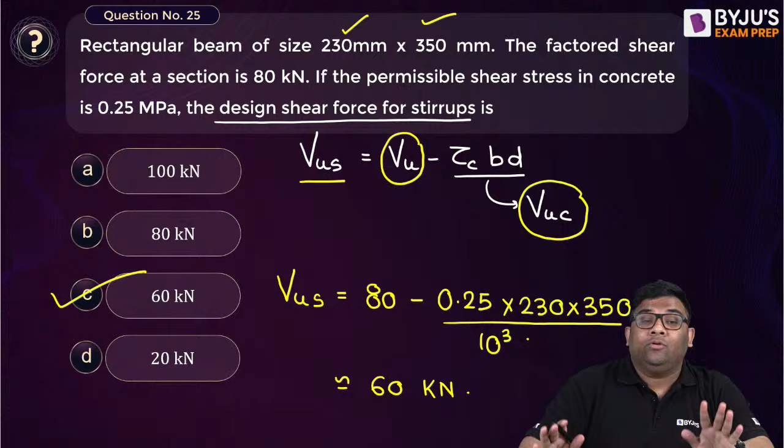Why I put this numerical? Ladies and gentlemen, why I put this numerical? Because you have to remember that in the examination, in state examinations especially, they will not always ask theory. Some 10-15% questions they will ask you are straightforward numericals which can be solved within 1 minute, and therefore you should be prepared for such straightforward numericals also.

Okay. Next question, question number 26. The maximum span to depth ratio for two-way continuous slab for Fe 250. That means what? Mild steel. Tell me what is the right answer to this? Two-way continuous slab. Yes, it is 40. I'll tell you. See, in two-way we'll have simply supported or continuous.

See, in one-way slab, whatever beam follows, one-way slab also follows the same thing. Means what? 7, 20, 26. 7, 20, 26 is followed by one-way slab and your beams. But when it comes to your two-way slabs, then you have to see if it is mild steel or HYSD. For mild steel, the ratios are 35 and 40.

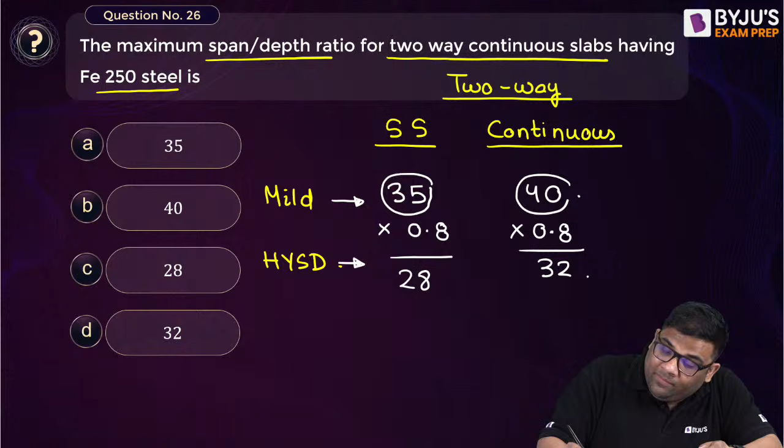But for HYSD steel, what you will do? Just multiply this with 0.8. So this will become 28. And multiply 0.8, you will get 32. So if you remember this for mild steel, you indirectly remember for your HYSD also. If you remember for mild steel, you indirectly remember for HYSD also. So it is written first of all, see.

Two-way, yes. Continuous, and then mild steel. So answer is what? 40. Understood? 40. If the question was two-way simply supported mild steel, answer would have been 35. Okay. Next question 27.

In WSM, under wind and earthquake load, the permissible stresses are increased by, very straightforward question. Come on, fast. We are only at question 27. Oh my God, we are so slow. I am explaining also, na? Okay, no problem. But let us make it fast. Straightforward, 33.33%.

Question number 28. What is the minimum lap length? Lap length means what? When you are joining two bars, you have to lap it. So the minimum lap length for bars under compression, what is the answer to this? Yes, it is 24 phi. This should be minimum 24 phi.

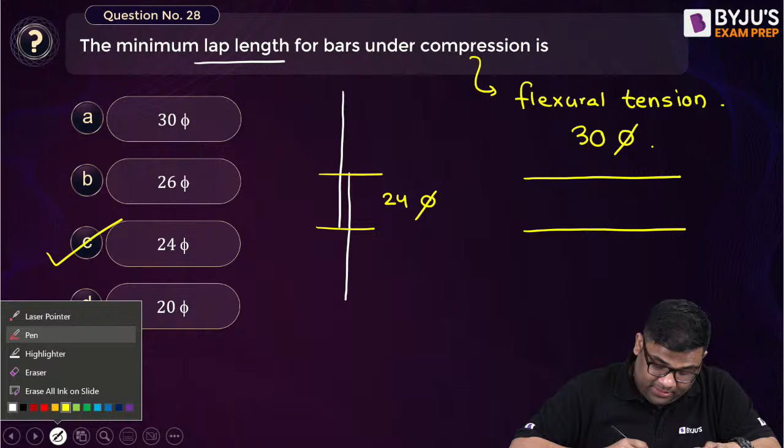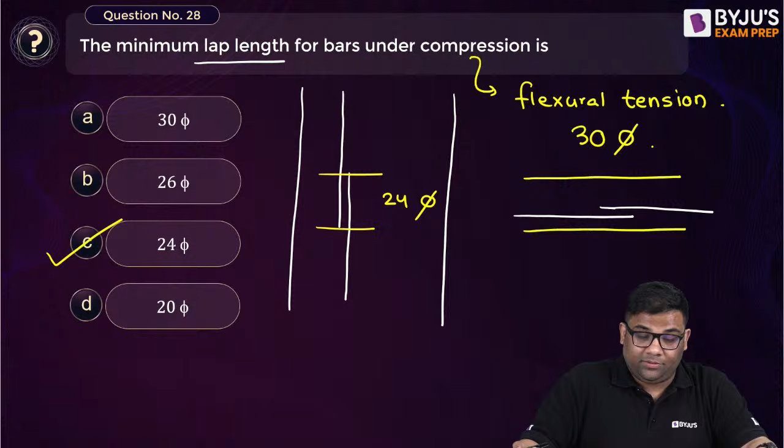And when it is flexural tension, or we can say the tensile bars in the beams, that is 30 phi. Remember, suppose this is a beam and you are lapping the bars like this, it is 30 phi. But in column it is 24 phi because columns are related to compression, right?

Next question, the critical section for shear for simply supported beam is at what distance from the face of the column? So if you have a simply supported beam like this, and this is the face of the column, this column acts as support, then the critical section for shear is at what distance? The answer is D distance. So this option is also D. But D is the effective depth. Okay. Question number 30.

You can see how the questions are so nicely mixed that all your concepts are revised. Next question. No, but the two-way you are telling, that is for footing, that is for punching shear, different thing. Okay. Now answer this.

The maximum deflection, including the effects of temperature, creep and shrinkage, after erection of partitions and finishes, should not normally exceed what? Both A and B. Yes, A is correct. Both A and B. Remember these deflection limits. No need to remember so many things.

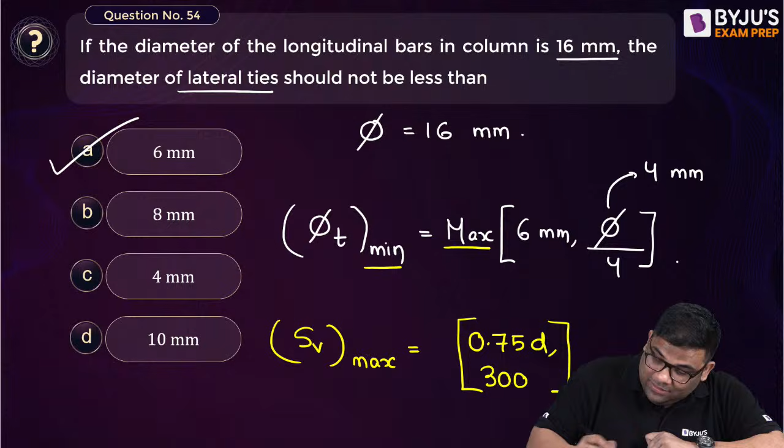And remember, if you are getting confused between minimum and maximum, see, if this is minimum, this should be maximum. Remember this. What is maximum spacing? Is it minimum or maximum of these two? Minimum, na? Yes. So remember, every time if this is maximum, this will be minimum, and if this is minimum, this will be maximum. Understood? Now you will not get confused.

Next question, question number 55. The neutral axis of a T-beam exists where? Yes, it is D. If you are taking a T-beam like this, it can be within the flange, it can be at the bottom edge of the slab, it can be below the slab — everywhere it is possible. So answer is D. That depends on many conditions we are not discussing here.

56. The torsion resisting capacity of a given reinforced concrete section, what happens to this? Answer me. The torsion resisting capacity. Yes.

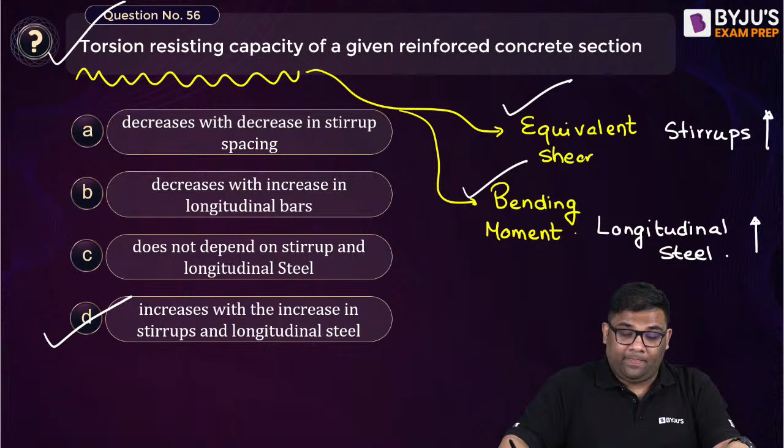Torsion will give rise to equivalent shear and bending moment, right? So if you want to counter the bending moment, what do we do? To counter bending moment, we have longitudinal steel. And to counter shear, we have stirrups. So if you are increasing the stirrups and increasing the longitudinal steel, both the shear and bending moment capacity increases. Indirectly, torsion resisting capacity increases. Answer is D. Understood? It increases both with increase in longitudinal steel and stirrups.

Next question, question number 57. The minimum value of minimum eccentricity for which the axial loads in column are designed. Remember this? Tell me what is the answer. Minimum eccentricity was L by 500 plus D by 30, or 20 mm, whichever is more — or I can say maximum of these two. So if it is 30, I will take 30. If it is 18, I will take 20. If it is 16, I will take 20. So can I say the minimum value is 20 mm? Yes, the answer is 20 mm.

58. Effective span. Simple support beam having a clear span of 6 meter. Support width is given 350 mm. And the cross section are 300 and 500. Nothing is mentioned, so always take this as the effective depth.

Tell me the right answer to this. It is LC plus width and LC plus D, whichever is minimum. Now, this width is width of support, not width of beam. That means this is 350, and this is 500 — it's not the width of the beam, it is width of the support. So the answer becomes 6350. Remember this, don't get confused. And this is 6000 actually mm.

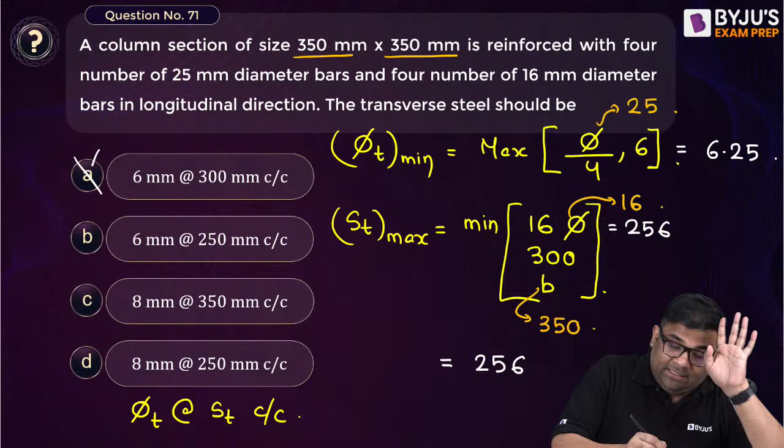Now what happens here, the minimum size is 6.25, right? And the maximum spacing will be 256. So 256, this and this, maximum spacing will be 256. Now answer me: if this is the minimum diameter and that is the maximum, minimum diameter is 6, so these two get cancelled, right? Because there are 6, so minimum diameter is 6.25. Take more than that, right? Now the maximum spacing is 256, so it cannot be 350. The answer is D. Understood everyone, this question or not?

Tell me, everybody understood this question, how to answer this type of lateral ties question? Any doubt in this? Clear? Okay, see, minimum diameter means maximum, right? Maximum spacing means minimum. Here minimum means here also minimum. Here maximum means here also maximum. Okay.

Because it is 6, minimum diameter is 6.25, no? So take more than that. Understood? Minimum is 6.25, so you have to take more than that. So you cannot take 6. Take 8 or whatever, okay.

Next question, question number 72. Okay, percentage loss, slip loss. Now slip loss is what?

Slip loss is the slip amount divided by the length into 100. Because this will be the strain, right? Not 100, it is Es. See, what is loss? Loss of pre-stress means strain into modulus of elasticity. This is the strain, right?

So slip is 6 mm. Length is 30 meter, so to find out strain in unitless terms, since it is 6 mm I have to take length in mm only. So strain into modulus of elasticity, 2.1 into 10 to the power 5. So this is the slip loss.

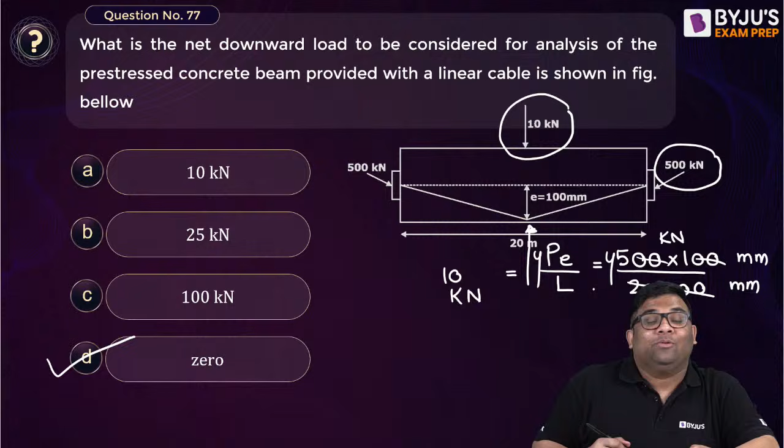10. Yes, the load is inclined, obviously. Getting 10. So 10 is already acting up, from below. The load is balanced perfectly. So the answer is 0. So remember this: whenever we have a triangular profile, the upward load is 4 PE by L.

And when we have a parabolic profile, the upward load will be 8 PE by L square. This will be the upward UDL. 8 PE by L square is the upward UDL. Understood? So this thing you should remember.

Next question, 78. Development length for a bar under tension is 400. What is the development length for the same bar under compression? I'll give you the hint that development length is inversely proportional to bond stress. So when it changes from tension to compression, the bond stress will increase, na?

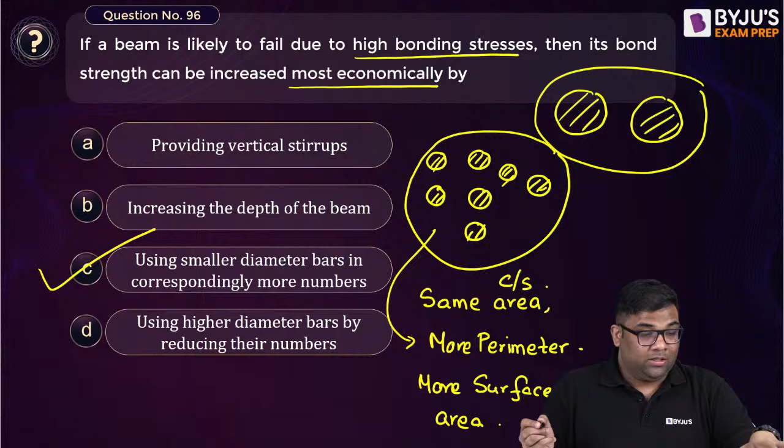Question number 97. Okay, big question. This is homework. Read the question and do the homework. Okay, one homework at least I should give. So question 97 is your homework.

100. Last question. Limiting amount of steel, AST limiting. You can find it from the formula C limiting is equal to T limiting. I have already explained in one lecture. So 0.36 FCK XU limiting into B will be equal to 0.87 FY AST limiting. We even solved this question in the GATE session. So straightforward questions like this they can ask also.